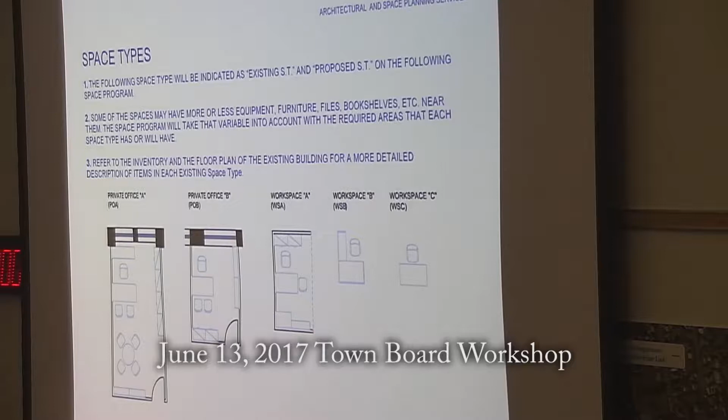Space program, just real quick. This is still the analysis, just so you'll know when you're referring to the booklet. There are 5 different space types: POA, POB, private office A, B, and workspace A, B, and C. And each one digresses to a smaller space requiring less square footage.

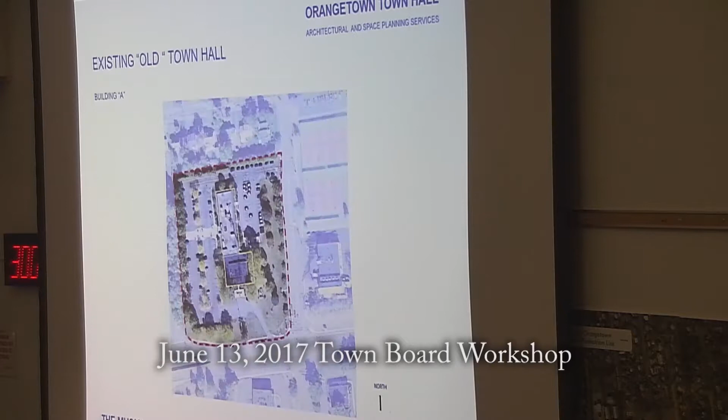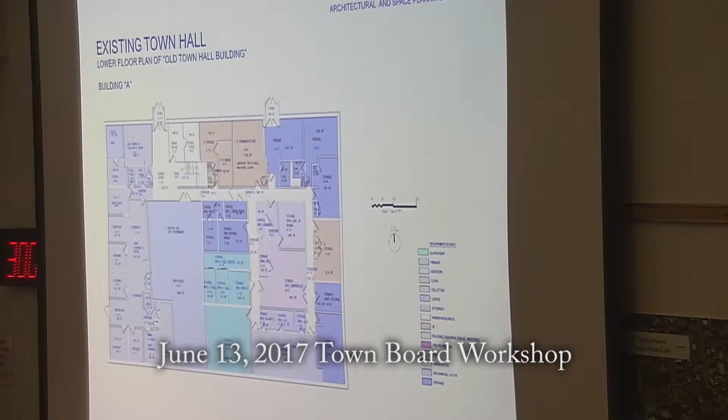Move on. Okay. So we're going to call this Building A, which is the building we're in, the old town hall. And it looks like this. You can see the color charts in each one. There is an insert of the floor plan in there so you can see it a little bit easier. The names of the spaces and square footages and the colors are all there. This is the lower and the upper floor.

Go ahead. Now this is Building B, same thing. You can see a lot of blue there. That's actually the police department. And on the upper floor, on the bottom right of this plan, there's the town clerk and then part of the judicial system, the courthouse, courtroom.

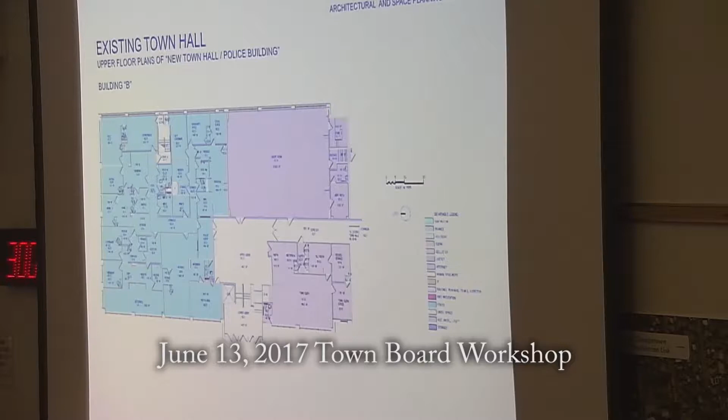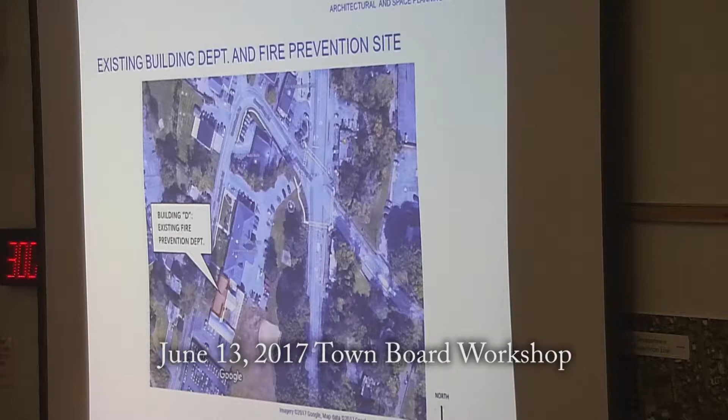Keep going, keep going. Let's go to the building department. Okay.

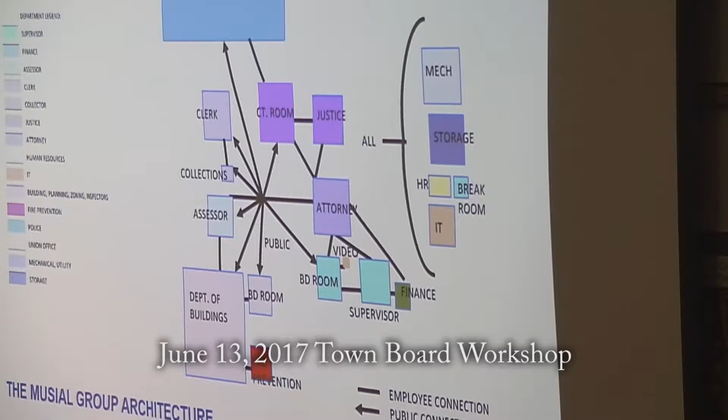We have another blocking study talking about the adjacencies. These are proportional to the size of the departments and how they interact with the public and also with themselves. Now, here's the fun part, the synthesis. This is how we bring it all together and come up with 7 different schemes that we can review. Let's move on through this.

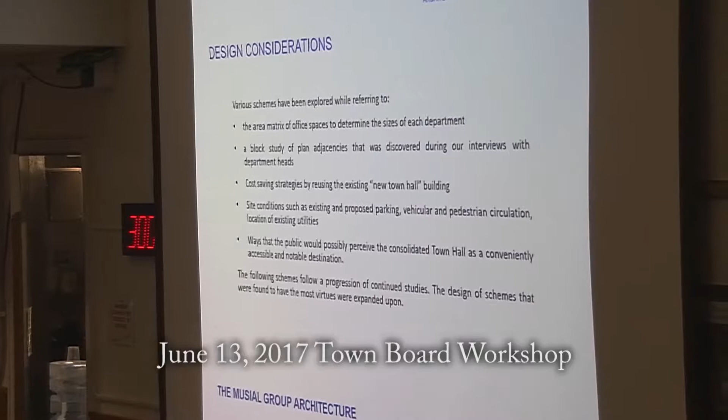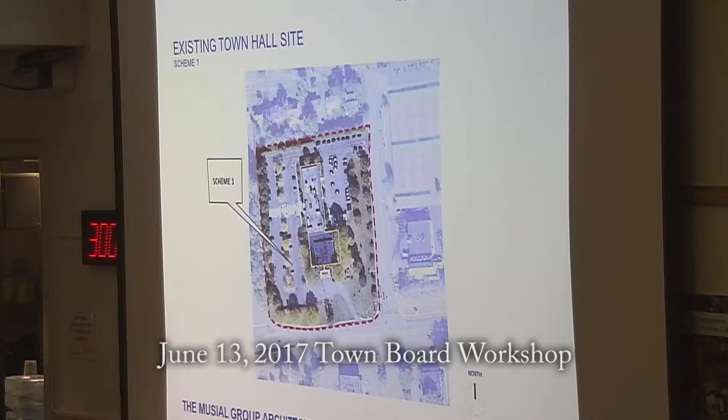Scheme 1 is shown mainly where the orange dot is. Next. If we were to have a tree-lined promenade and really accentuate Orangeburg Road as it goes from east to west towards the town hall, you see where the orange dot is. It creates a backdrop with that promenade, taking out building A, and now we have this whole backdrop.

When I was in a marching band, I called that the fanfare formation, because we would do that with the homecoming queen in the middle. So this would be a fanfare type of formation.

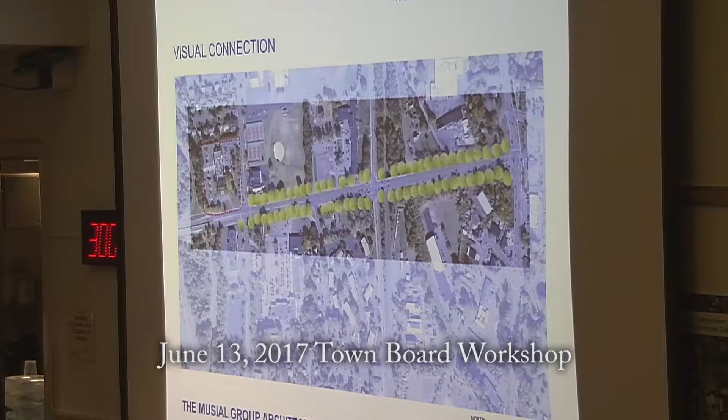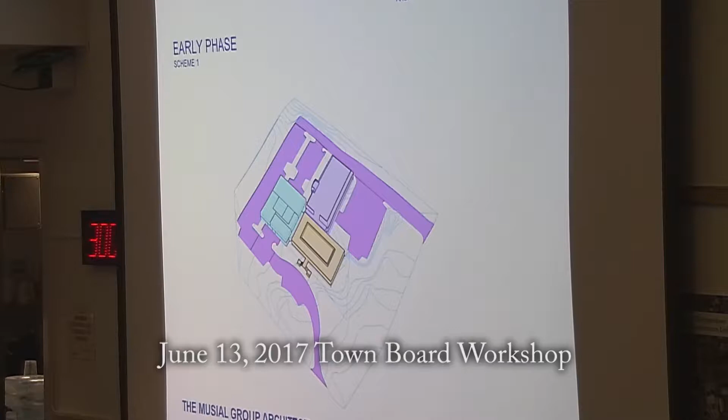Go ahead. Let's go back. Okay, so we have the existing town hall as it is today. If we were to do it in different phases, this would be the early phase, where the cyan color is what we would build as a replacement of building A. Building A would stay while people occupy it during the first construction. And at the end result, the addition would be there, with a connection to the other part.

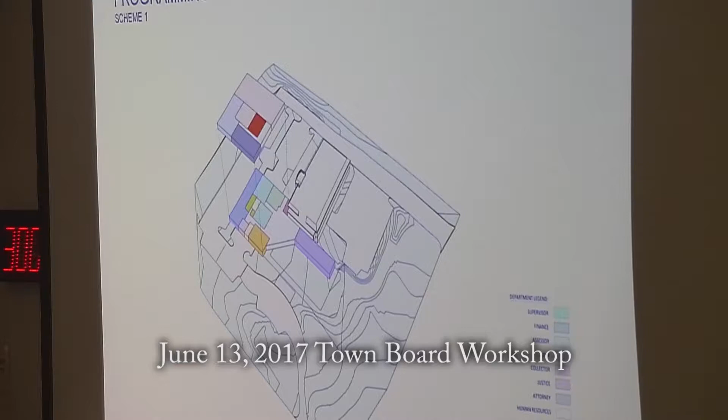It splits up like this. Remember those colors for the departments? That's the departments and how proportionally they would be laid out. There would be a 2-floor layout in this scheme. And there it is in plan, and you can see how the parking works out, and where it has more of that backdrop we were just talking about. Okay. And the pros and cons of this.

The pros: you can maintain this site as the existing town hall. People are not going to have to look for the new location. They know where it is today, and they'll know where it is in the future if we stayed here.

There would be a savings in construction because we are not rebuilding building B, where the police department, town clerk, and the courtroom are today. They can also occupy the existing building B while phase 1 is going on. The fanfare, we talked about, and this site might be a bit more accessible for emergency vehicles compared to the RPC site.

The cons on this is that it would have to be done in various phases. There is less land than the RPC, and there would be some phases, temporary facilities. We also came up with some other ways to get around that.

Let's move on. The cost estimate for this scheme 1 would total to $10,234,525. That includes the construction, the site work, and the furniture equipment. But it does not include any temporary facility that might be needed. Move on. And it doesn't include like architectural design, soft cost type stuff. That's right. It does not include the architect's design.

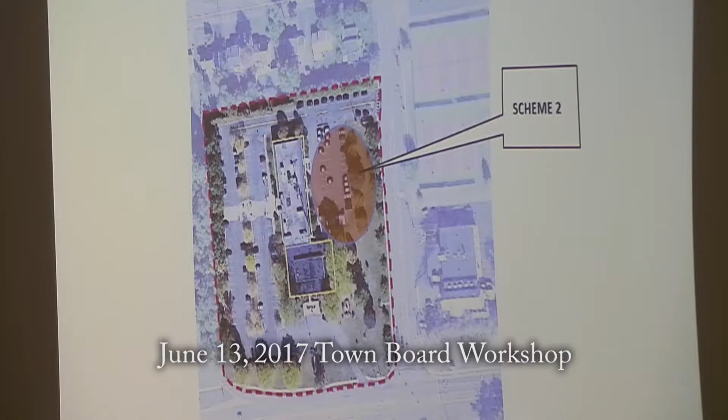Some cons, some very big cons. One main one is that there's an antenna tower right here with the equipment building next to that, and to connect a building here to here would be pretty laborious for the people working there, and it just doesn't work out as well as some of the other schemes we came up with. Let's move on. And I just covered most of these. Let's go to 3. Go ahead.

Next. So 3 was to rebuild this in the same location, and I think that we can do much better. So there's some pros and cons of that, but you can look at that, but I think we need to move on to the next one. Scheme 4. Now, Scheme 4 is kind of exciting. It has a lot of virtues in that we are able to build it over here and connect to this building this direction, or also here. And there's also another scheme where we're actually having a pedestrian public entrance from this way where the parking is as well. All the parking in there, and we can come in both ways.

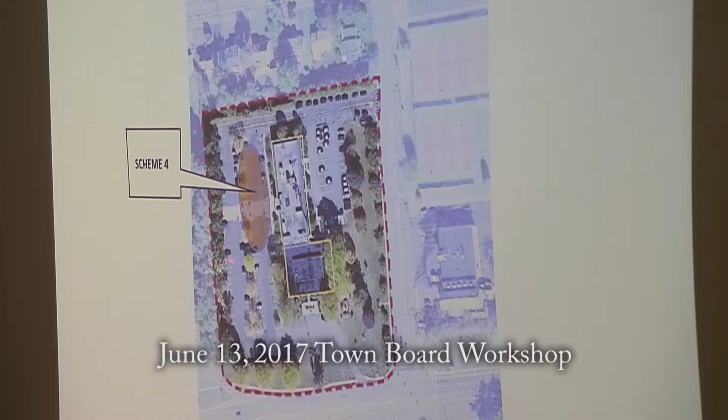Go ahead. So to do something like that, the early phase would be to build this area here. Now, in this area, we've got a generator, we've got a couple of cooling towers. Those do not need to be moved yet while we're doing this. So this can be functioned. The generator services this, and the cooling towers, as I understand, service the building B. And they will eventually need to be relocated, but not in the very first time. It's not going to prohibit this work to begin.

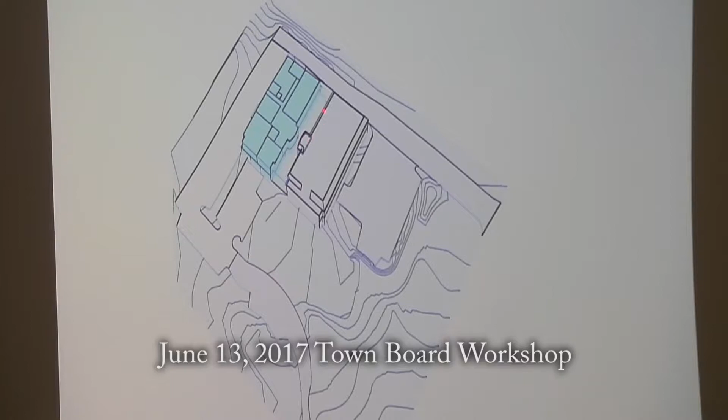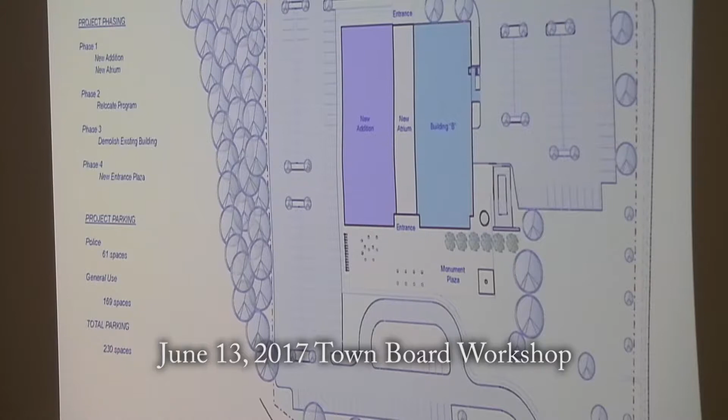Next. And then at the end result, we would have the building here in a 2-story format. And in between there, we're actually proposing to have maybe an atrium to connect that, where the outside wall of this becomes an inside wall of the atrium. Go ahead. And then to split it up to show you how the departments might be blocked out, it could be something such as this. Move on. And then in the plan, it shows how the parking can actually be configured around something like that.

Next. And then I just talked about most of these pros and cons. The cons obviously is similar to the scheme 1 that we just talked about, because that's to be done in phases, and the RPC land is larger. Move on. Now, conceptual schedule, Mr. Musial? Well, it's a little bit difficult to see, but basically, this is a many-phase project, regardless of which scheme you do, and the closeout would be in January 2021.

That would allow for the various phases to take place, and this schedule, which we'll give you a handout shortly, shows where we are today, the next meeting, and then the various selections for surveyor, geotechnical, et cetera, environmental. And then when the bidding would take place, the 3 phases of design, a schematic, design development, construction documents, and a bidding. But the bottom line is this particular schedule takes you out to December of 2020 or January 2021.

All right. The construction cost estimate is slightly more than what we were showing with the Scheme 1, mainly because of a larger atrium and also for some of the interior work that we're doing inside of the Building B. Why don't you talk about the soft costs coming up? Well, the soft costs, we just simply took the construction cost for the architect's fee and just plugged in 9%. And remember, there's slightly more than 2 years of construction that has to take place, the first phase being about 18 months, and then the other phases add up to about another year.

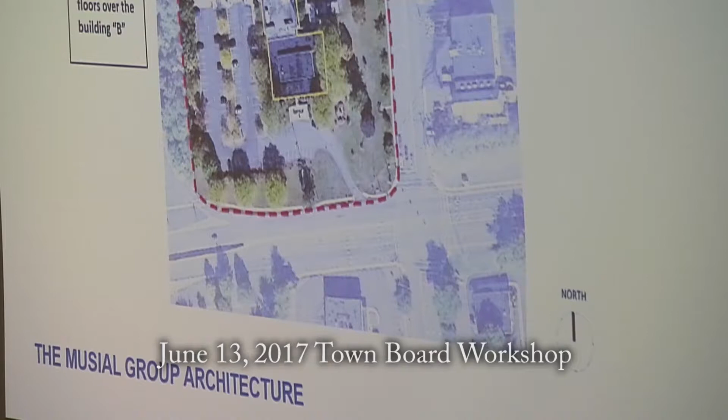Next one. Okay. So another scheme we have is Scheme 5. Now, this was talked about early on, and we were asked to look at this, but we looked at it briefly. Scheme 5 is to build on top of the existing Building B. Now, to build what we need, square footage-wise, we would need a 2-floor building to be over this 2-floor building. And structurally, I don't know if it's sound to do that. Also, if we did that, we may have to straddle over this building to support a 2-story building. Circulation, it brings in some challenges, and so we did not explore that very far.

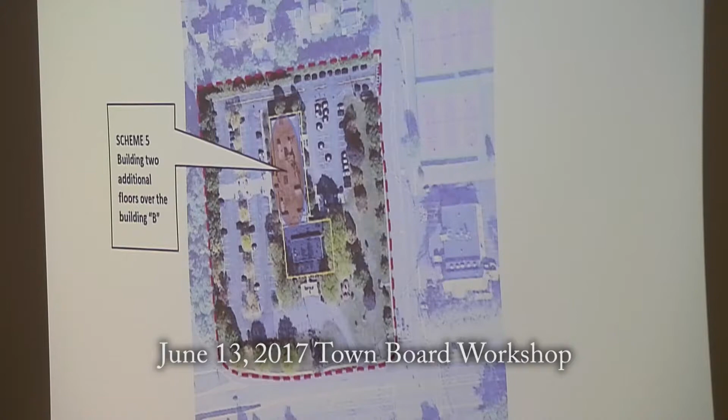Maintaining occupancy. Pardon? Yeah, that's right, exactly. You can't maintain occupancy during construction of the structural steel above, so you'd have to find some place to put those people, which doesn't make a lot of sense. Right. So you would be displacing at least 28,000 square feet. People could stay in the Building A, but Building B would have to be vacated.

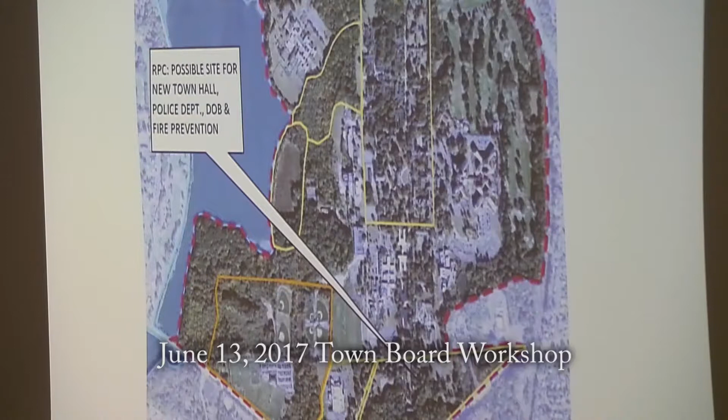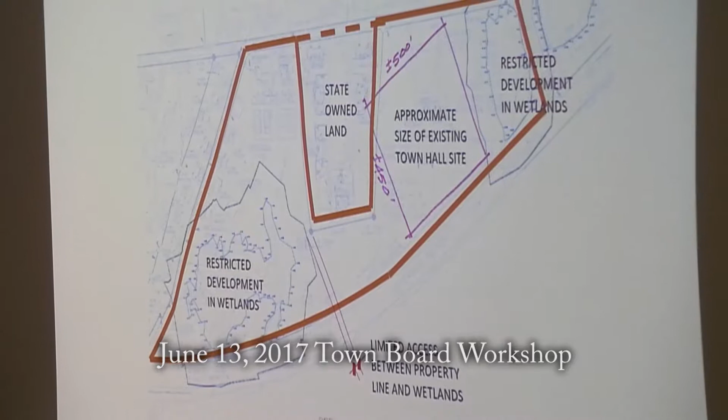So let's move on. All right, so we were looking at Scheme 6. 6 would be down in this area. Go next one. In this area here. Go ahead, next one. So the property in the Rockland Psychiatric Center is made up of this property, but this cutout is, I guess, state-owned. So just to give you an idea of how big this property is, if you put this box in there, this box represents roughly the square of this property that this existing town hall is on.

This area here is a wetland. You cannot build on it. This area here is also a wetland, cannot build on it. And this then creates a very tight connection. So if we were to have the restricted, limited vehicle access from over here, and then to expand into this area with vehicles, it would be a little bit of a bottleneck to get into that area and a long walk to get back unless this is purchased. And if you were to use this site, I don't know that we really need this for actual parking, because we can have quite a bit more parking in here than in this site.

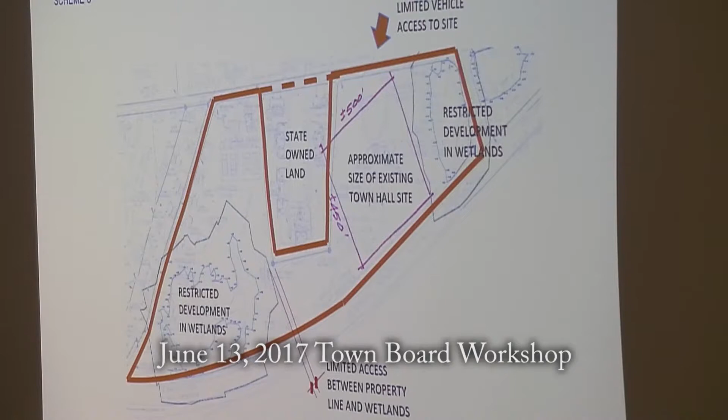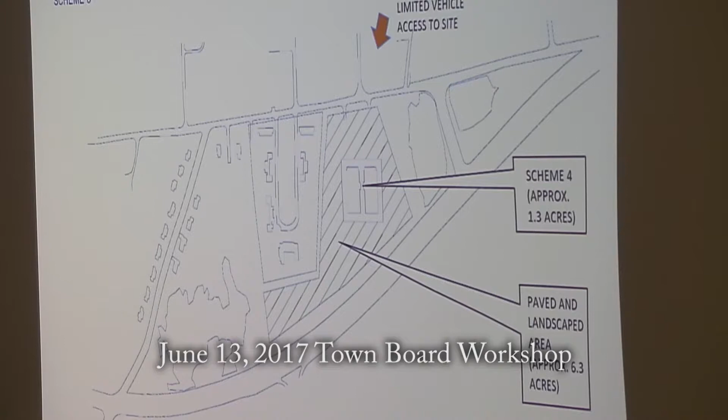Okay, and we could have access from the Orangeburg Road here, but this area is low, but this area is high. In order to have that, this county road would probably have to give permission to have curb cuts coming in, maybe an off-ramp, and then a ramp to get up to the higher elevation in this area. This hatched area is to show approximately 6.3 acres. And then this area here is to indicate what it would look like to have a new town hall with a police station similar to what we were just looking at on Scheme 4, just to give you an idea of how it might fit.

Okay, next. And I think I may have talked about most of the pros and cons on this. The main con in my view is that it's not currently seen to be the center of the town. Maybe it could be if it was pushed out there, but there would be some effort in order to relocate all of it.

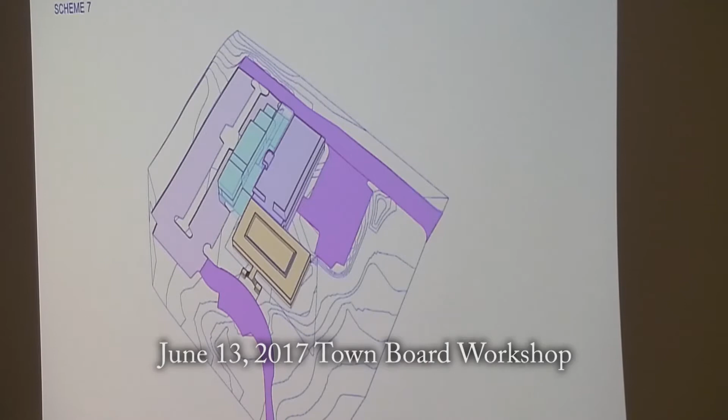Okay, let's move on. Got a quick question. Not saying we're gonna do it, but do you guys have a value on this land if we did relocate, how much we could recapture with the sale of this property? That has been discussed, and I'll have to shift that over to the supervisor. We haven't had it appraised, but I've asked our staff appraiser to, for mixed use. Well, yeah.

And second question, your numbers and all the hypotheticals and examples, does that include demolition and abatement cost? It does not include abatement, but it does include the demolition. We're going to refine the numbers to give you a better breakdown after you decide which scheme or which couple schemes you want. Then we'll refine the numbers and give you a better breakdown of all of it. But yes. In your experience, could you even give us an estimate?

Because on example 2, I'm already up to like 14 million. Numbers mean a lot to the people that live in this town. And most of these examples are up to $14 million already without abatement. Right. And the other question is, I advised the supervisor, I wanted to know what the cost would be to fix the existing problems at Town Hall and get a number for that, instead of doing any

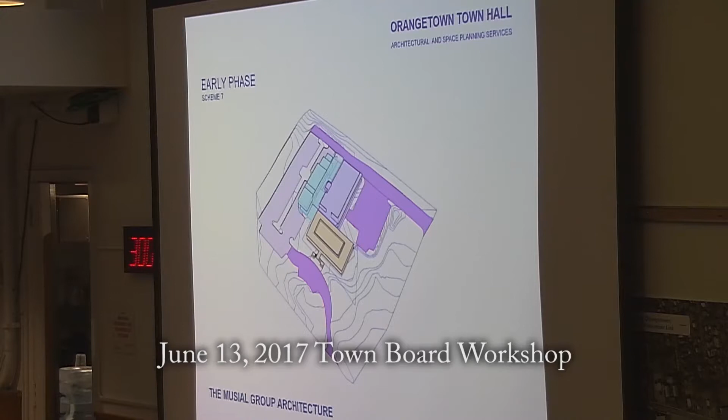And finally, we have a seventh scheme. This one here is a derivative of scheme 4. And what is different about it is the footprint in the addition is shifted up a bit for the ground floor and the second floor. And then there's another level below it. So there's 3 levels in this scheme instead of 2.

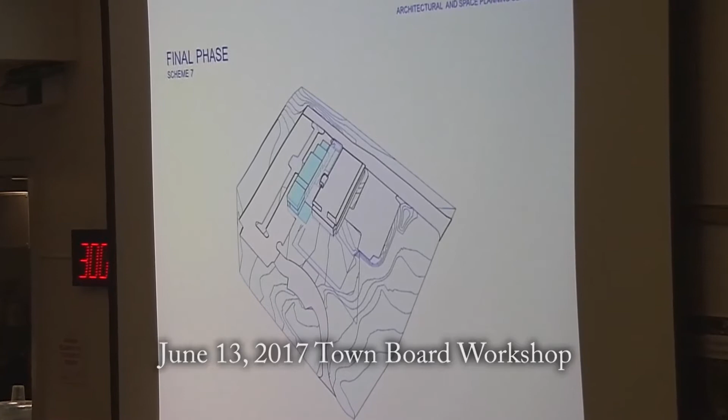And with it shifted up, what it does is it creates, again, the backdrop that we are trying to accomplish with scheme 1. So we have the best of both worlds of scheme 1 and 4 having the backdrop, and with it having 3 stories instead of 2, the footprint is less. Therefore, we can have a little bit more flexibility of what we do with the parking and the landscaping in that area.

It also allows for the entrance to be here, atrium here, and it also allows for this area here to be the room which would be replacing this room, the boardroom, where it would be accessible to the public easily. And then it could be a public entrance in this area coming in from that direction. So from the parking lot on the west side, from the parking lot on the south side, and from the north side coming in. So there's a lot of accessibility into that.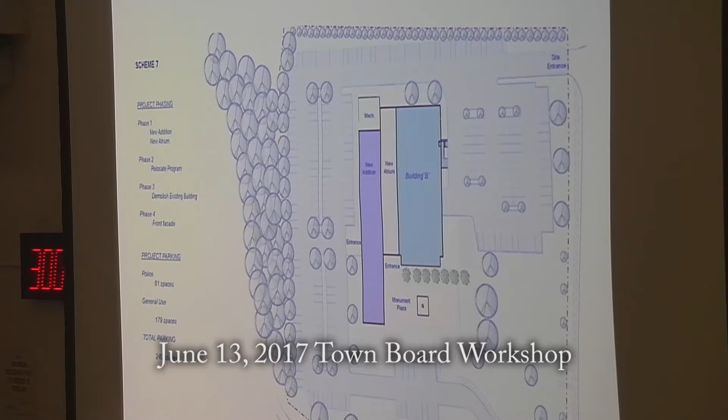The basement can actually travel underneath this atrium area, and could be a little bit more efficient in square footage, which also can translate to less construction cost.

Okay, move on. So the appendix, I'm not going to go through any of this really, but just so you have it, it's an inventory. This is something that we will use if we are asked to continue in the schematic design and design development, just to back reference what was in each one of the rooms per room number, so that we can get a better idea, not just photographs, but this actually documents that too. And then we also have an organizational chart for the police that was helpful for us to understand more of how things stack together.

So the next steps would be, we need your input. We need to learn a little bit about some of your concerns. We've heard a little bit of them. We'd like to hear a little bit more. And then we would like to incorporate that into what you just saw in a more narrowed down focus. And then we can refine also the construction costs. So all this information will be in the final document that we give you at the end of this process for you to dwell through.

Let me just clarify next steps and process. I know that we're going to have questions now, and that's what we're here to do. But it's not going to end here. As soon as we go home, we'll have other questions. You'll have thoughts and comments. And so we need a process to move from step to step. One of the things that we talked about the other day when you came and met with me and a few others was to set up a community time when we could really do that Q&A. The town board would be there, other members, and we could just ask and get into the weeds a little more. So that was one thing.

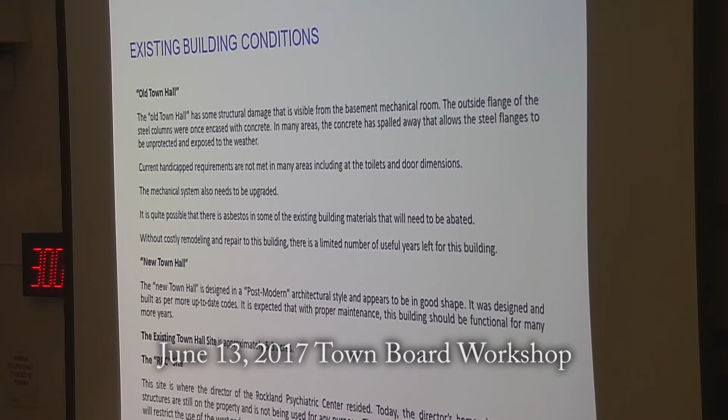And as far as, you know, you noted that there's a substantially higher cost to go off-site because of moving the police department. Yes, it did. Of course, you're right, that could potentially be offset by the sale of this property, and that revenue would in turn be kind of reverse offset. I think anyway, the town would want to look at buying Staff Court because the shape of that parcel is a little odd without taking ownership. So there's a fair amount to sort out with these questions of the off-site locations.

And I think I hear your recommendation as an expert is you're fairly skeptical of the idea of moving from a really great location from Town Hall. Yes, Supervisor, I am. Well, I think Vicky answered that question, because she said $300,000 per acre? Brian said between 2 and 300,000. At the max, it would be 2 million. It wouldn't be worth moving down to the RPC property. It does not provide enough of an offset. It would still be coming in like $6 million higher.

So to me, that solves that equation right there. I agree with you. We are in agreement. I think it's a great start. Thank you for the presentation, but I agree with Tom. Excellent job, guys. I mean, there's a lot to be done, and admittedly by you as well, before any decisions are made to do anything. I agree with Tom in terms of, we have to do due diligence in terms of what can be done with this building. My guess is knock it down. But we want to see that demonstrated.